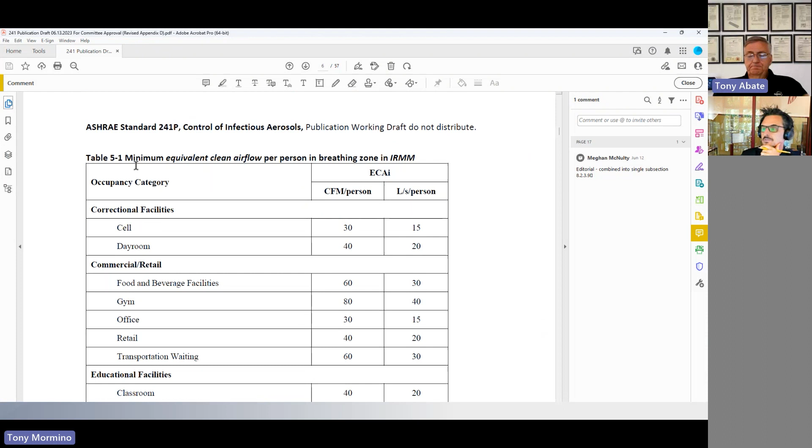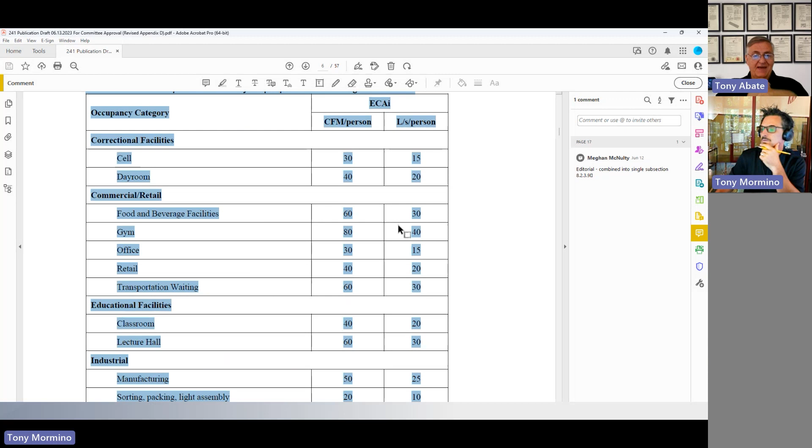So this is right here, Tony, table 5.1. Yeah, exactly. Those are all those enhanced CFM per person. Just look at them. For instance, a gym, 80 CFM of air per person. You know what the occupancy of a gym would be. So that is a lot of air.

So how do you get there? Well, for one thing, you can design your mechanical system to have the capability to bring in that much outside air. Very likely it doesn't have that—it likely was never designed for this. Right, but you could redesign it, take whatever steps are needed, and achieve these rates. It's not impossible. Probably impractical, but not impossible.

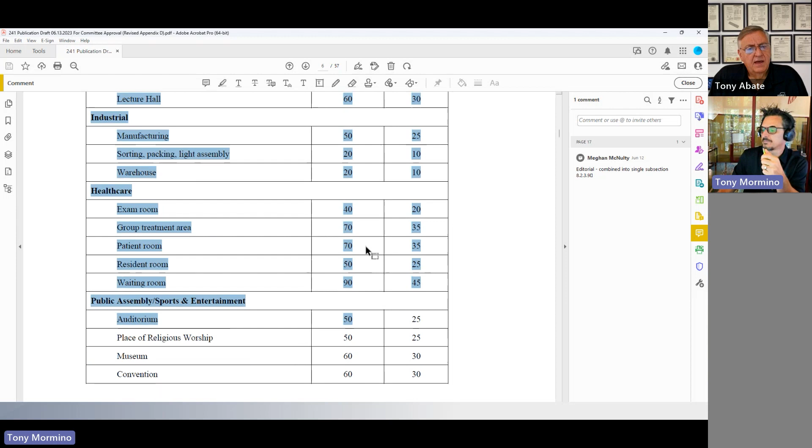And again, this isn't meant to be continuous. It's meant to be during the heightened concern—emergency mode, right, exactly.

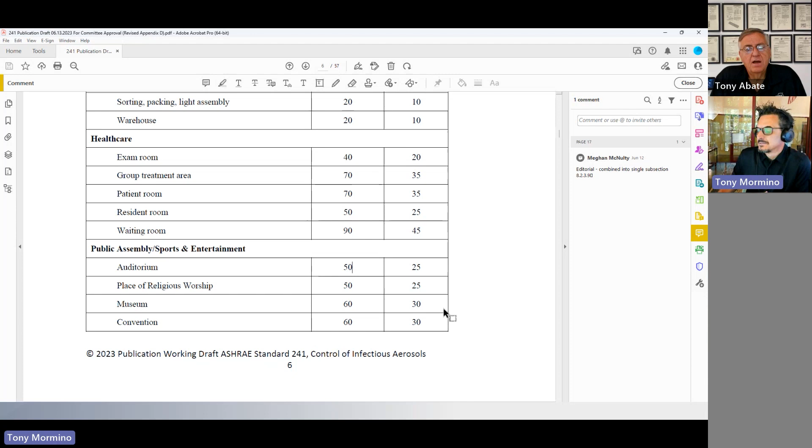Now here's where something very interesting comes in that was really kind of groundbreaking: the concept of equivalent clean air for infection, ECA with a little 'i'. What that means is that rather than just simply relying on outside air, you could look at air cleaning. The whole point is to deliver pathogen-free air. Now, if you bring in a lot of air from the outside, chances are it's going to be pathogen-free. And if it isn't, we have such bigger problems, it doesn't really matter what we did in the building.

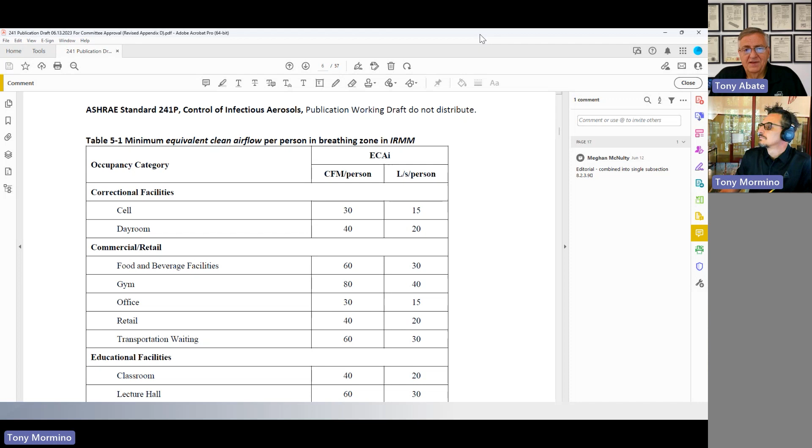However, there are lots of ways you can provide pathogen-free air in a building. You can take different types of air cleaning strategies, either singular or layered, and deliver pathogen-free air to the occupants. So what the standard says is: I don't really care if you use air cleaning to deliver pathogen-free air or you use outdoor air to deliver it. Just be sure you deliver 80 CFM per person of it in a gym, for instance, and so on and so forth. This is very different from all other ASHRAE standards, which basically always rely on the principle of dilution—bring in a certain amount of outside air, and then you will produce acceptable air quality.

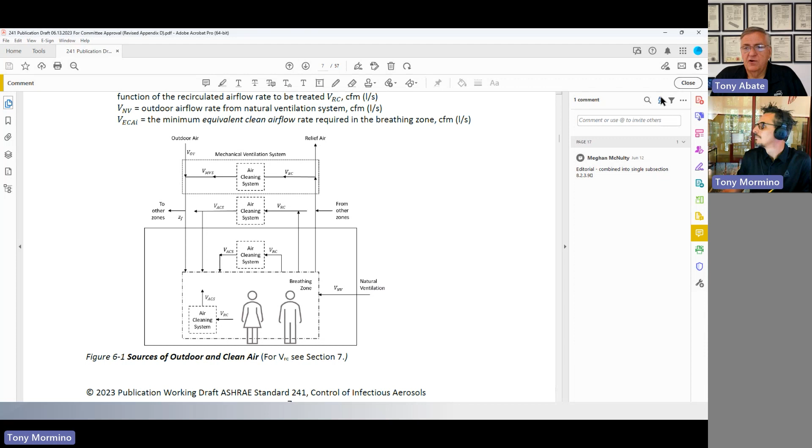It's really the oldest indoor air quality adage that's ever been used: dilution is the solution to pollution. 62.1, ventilation for acceptable air quality, is built on that premise. If you go with the VRP method, what is it really doing? You bring in a certain amount of outside air per person, and the building is assumed to be good.

So here, air cleaning becomes now a very viable part of the strategy. Because as you look at those tables and the rates you must achieve, it's really very unlikely you're going to do it with outside air alone, unless you take on some major redesign and major cost implications just to have that airflow available. But now, of course, you want to make that air comfortable, so you have to condition it all.

So I'd say the chance of that happening is pretty close to zero, ever. Well, I was talking to one of our engineers earlier today, and really think about the engineer that has to design a space. Oh, it's crazy, right? So is he going to design...

80 CFM per person times the occupancy, thousands of CFM of outside air, which again isn't going to be used on a continual basis, it's going to be used when it's needed. But you still have to design your system for that peak. If it ever happens, if you've got a gym that's normally 40 tons, now you've tripled that. So you have this V8 engine that you're going to be running on 4 cylinders most of the time.

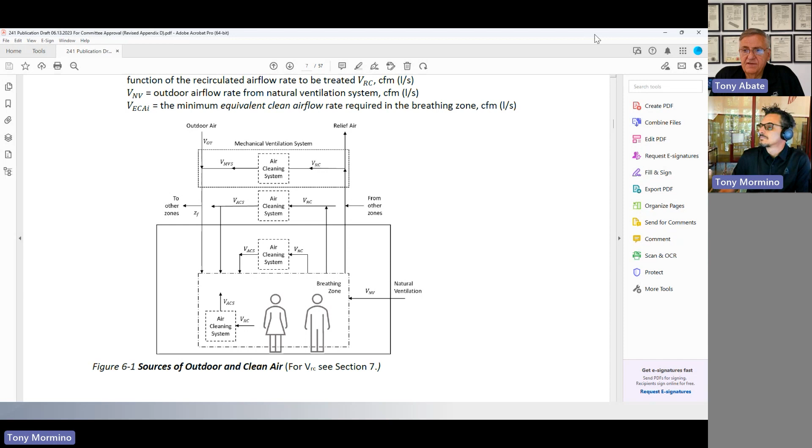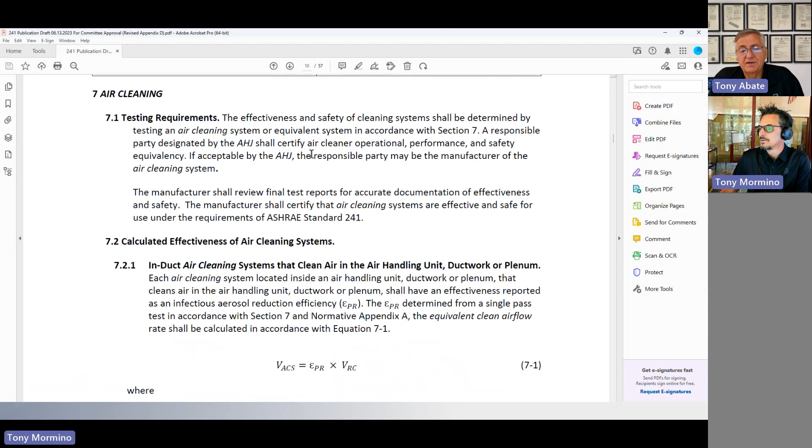It's much less likely that you're going to do that, but much more likely that you're going to look at air cleaning. From the AtmosAir perspective, as this was being developed, I was pretty excited because I said, now I think air cleaning is finally getting its place in an ASHRAE standard in a more prominent way, and not kind of hidden in the shadows of the IAQ procedure, so to speak. Because being able to clean that air is equivalent to being able to use outside air, equivalent clean air, all about delivering pathogen-free air.

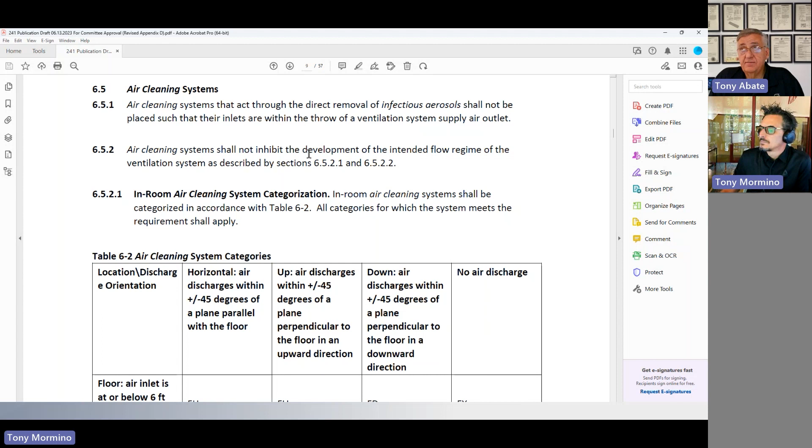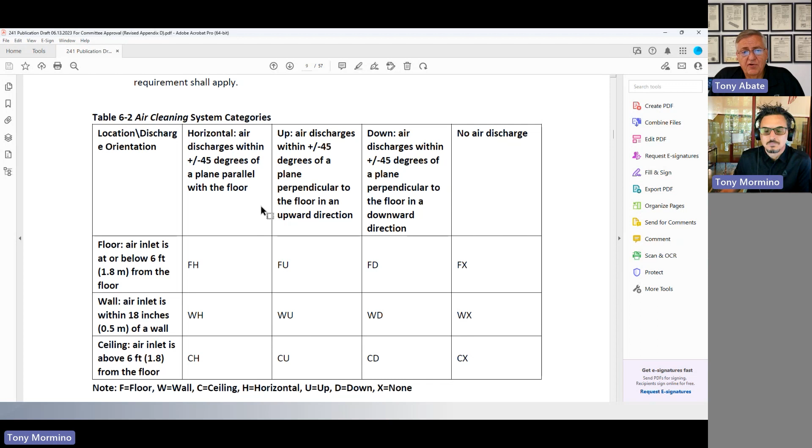Now, how you do that is defined in different parts of the standard. They talk about categories of air cleaning systems. What are the types? These could be in-duct systems, these could be in-room systems, or this could be a combination of both. So there's really an agnostic approach to air cleaning as far as the standard is concerned. You aren't limited to one type of design or another.

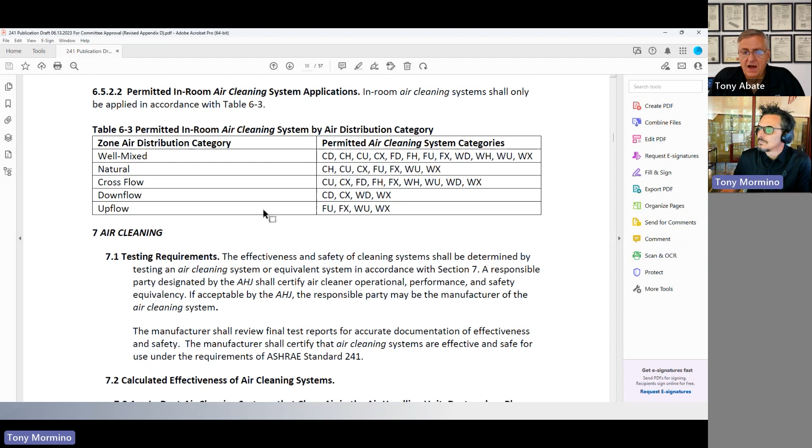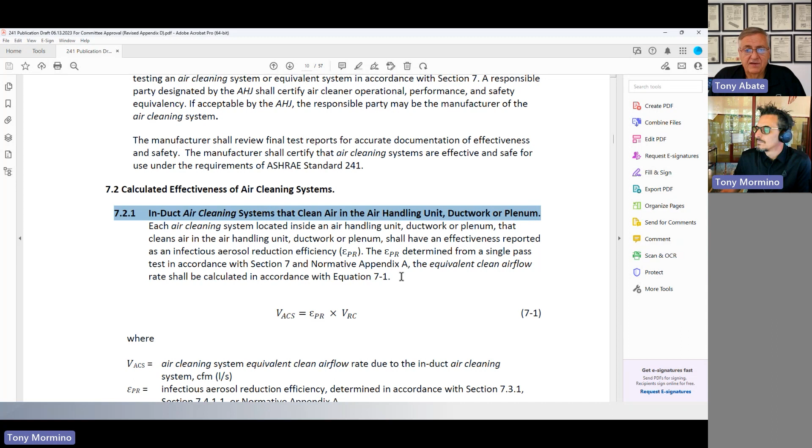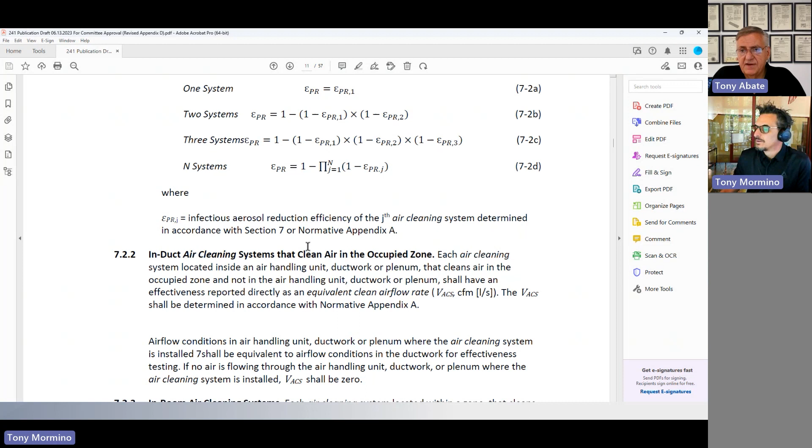It just depends upon the effectiveness of your technology, and how it can then, by means of calculations put into the standard, contribute to that ECAI number that you need to achieve. Does it go into the specifics of the types of technology, or just say you've got to meet this equation based on testing data you already have? It doesn't really specify types of technologies, but it specifies what those technologies have to achieve as far as proven effectiveness and proven safety.

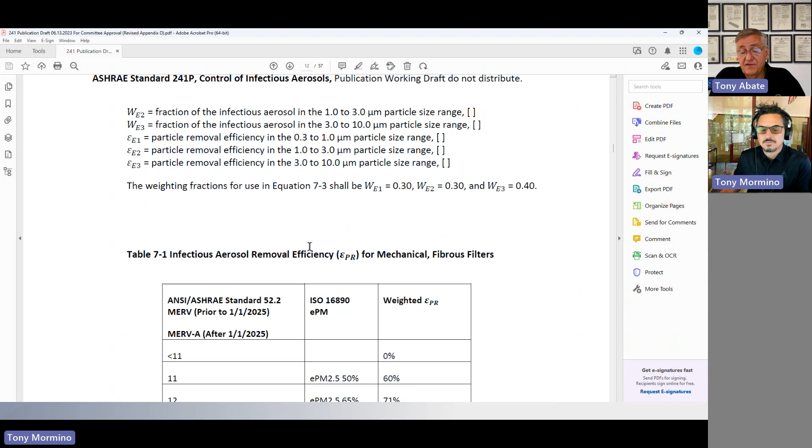At the end of the standard, there's a section called Normative Appendix A. Normative Appendix A lays out what constitutes the effectiveness of the air cleaning system. What types of testing should it have? What kind of performance metrics should it have? What kind of safety metrics does it need to meet? Very well spelled out, very well defined.

What you'll see is that it's depending upon manufacturers that have tested their product to standardized test methods. A lot of manufacturers have a lot of products and claim great efficiencies, 99.99999 to do this, that, and the other thing. It's not uncommon. But when you peel that onion back a layer, you may find they achieved that in a customized test. The manufacturer went to the laboratory and said, I'd like you to test this product this way. The laboratory says, you're going to pay me to do it? And they say, yep, and so they do it.

What this is saying, and really what I think more premier manufacturers will do anyway, is they'll test the product to a standard that already exists. So they say to the laboratory, test my product, and what protocol, what test method would you apply to this product?

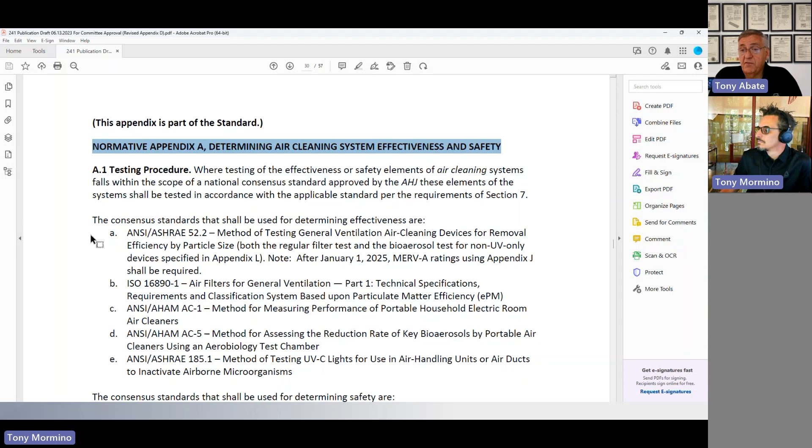For instance, let's say you're testing a portable room air cleaner, and you want to show how well it removes particulate. Well, there's a standard for that: ANSI AHAM AC1. You see that right there in 241. If you have a product tested to that standard and you have a performance measure to it, well, that's great for us, and you could put it right in here.

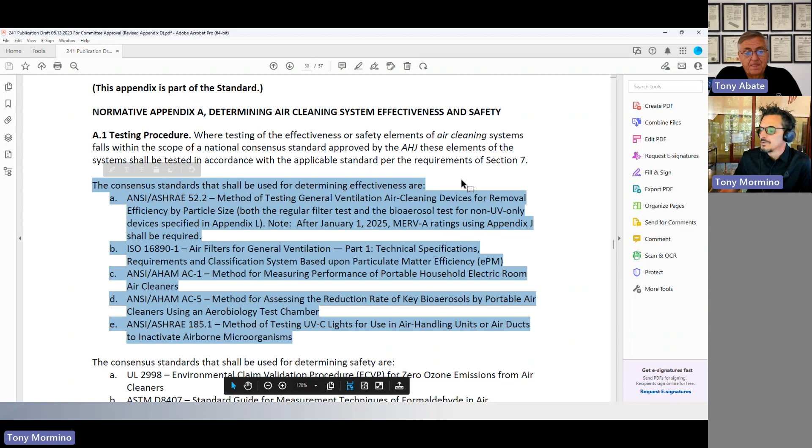So these are the standards you're referring to right here. Those are some of the standards. There are others. This doesn't limit it to just this group, saying unless you're tested to these performance metrics, you can't use the product.

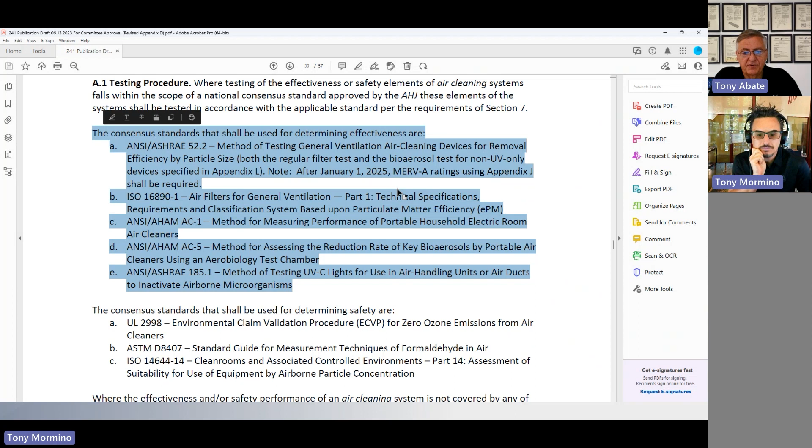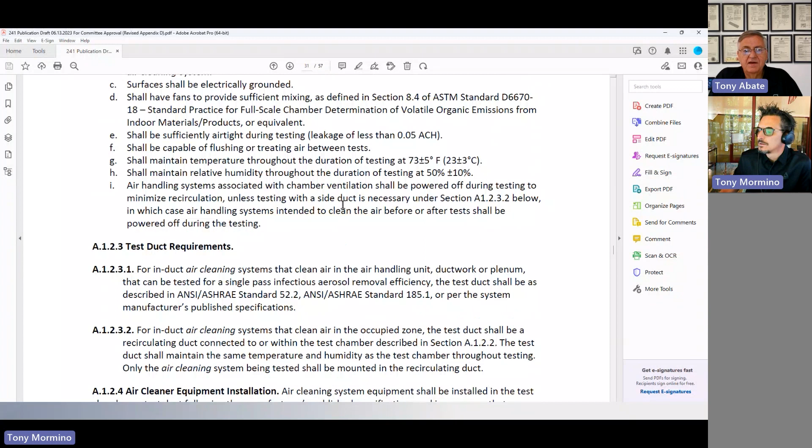Again, if you keep scrolling down a little bit, Tony, where the effectiveness or safety of a system is not covered by any of the above standards, it gives you the opportunity to really use something that doesn't have a national consensus standard. Did I pass it? Am I almost there? No, you actually went too far. I went too far, that's what I thought.

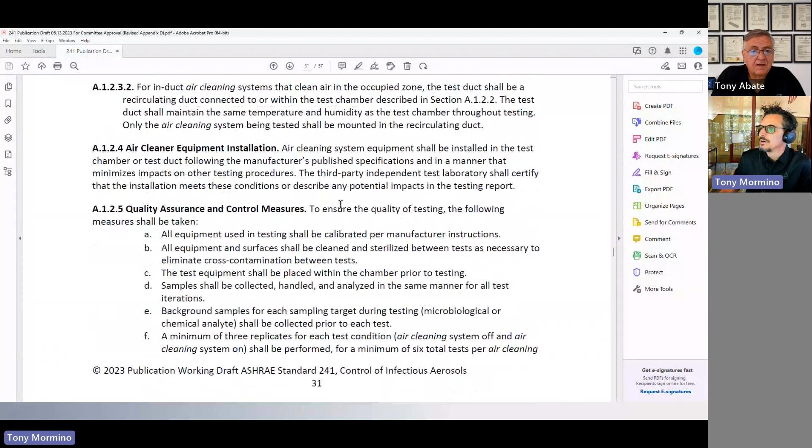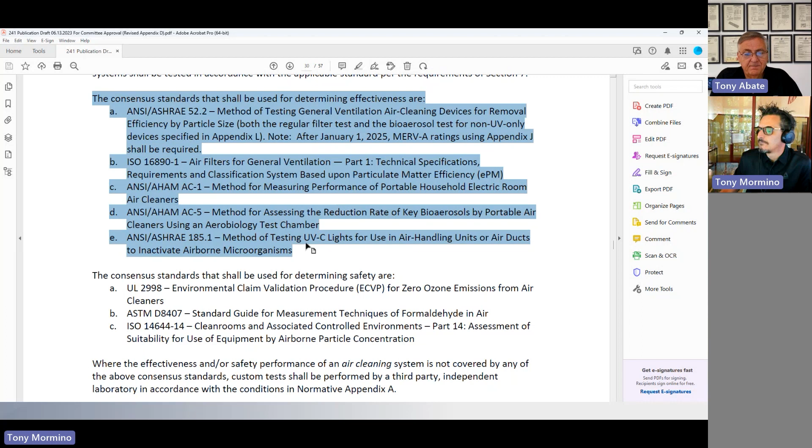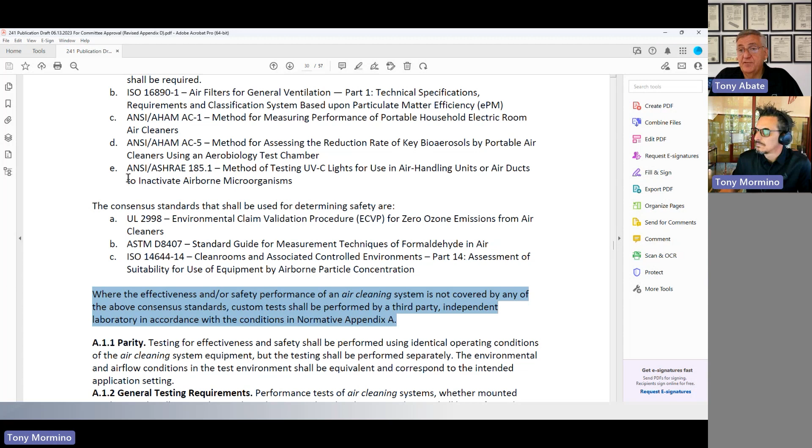Let's see here, go back a little bit more. Let's see, where are we? You're just right there, so that last paragraph. Ah, gotcha. Custom tests shall be performed by a third-party independent laboratory in accordance with the conditions in Normative Appendix A. So it's saying, hey, if your product doesn't fit one of these test methods, it's okay—test it by an independent third party, but they need to operate within some of the criteria listed in the standard. As we go further down, it talks about what those criteria are. This is giving guidance to the laboratory on the things you should do when testing this product.

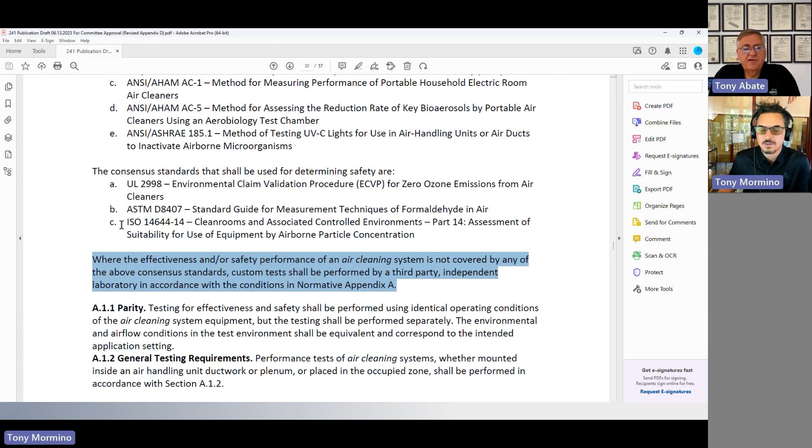And specific to AtmosAir, we already have testing done that complies with this normative Appendix A. Yeah, exactly. AtmosAir has done, first of all, one test that's called out very specifically above, ANSI AHAM AC-1.

That's been done on the AtmosAir technology already. We did that many years ago and have a stated performance in a metric called CADR, clean air delivery rate. You can take that and drop it right into the ECA calculations to add to your equivalent clean air rate. That already exists.

But also, AtmosAir's testing done in laboratories, like with MicroChem, looking at microbial reduction against coronavirus, MS2 bacteriophage, E. coli, staphylococcus—these are all done to ASTM standards, and those ASTM standards conform to all the requirements put into this normative Appendix A. So yes, those could drop right in.

And of course, for people unfamiliar, some of those were very impressive results—98, 99% effective on these various types of pathogenic elements. So that leads AtmosAir to being able to help toward that equivalent clean air calculation.

We've actually begun to build out our IAQP calculator, which we've had for many years. We call it Atmos IQ, now with a 241 section, so the engineer doesn't have to sit there and try to figure all these things out and spend days and days boiling down these calculations, no differently than when applying the IAQ procedure.

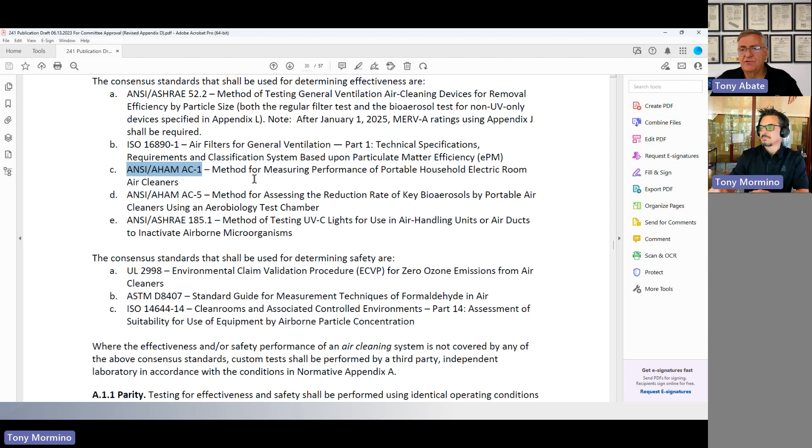There is a calculator that was provided as part of this standard. It's really buried at the end. There's a web link that brings you to a calculator that explains how ECAI is achieved. It doesn't tell you what any particular technology might do—it just shows you how to calculate ECAI. So that's free for any engineer.

But again, we want to take it a step further at AtmosAir—saying, okay, if you're going to design to this and also want to use our technology, let's give you a calculator that allows you to put that in. Actually, that's it—that's the ECA calculator. We wanted to give something specific to AtmosAir that's also kind of simple.

Is that available now, or is it still behind the scenes? We're trying to get the finishing touches on it. Our in-house engineers want to make sure it's right before we put it out, but it's coming soon, and I think it'll be a real handy tool as people start to want to apply this standard.

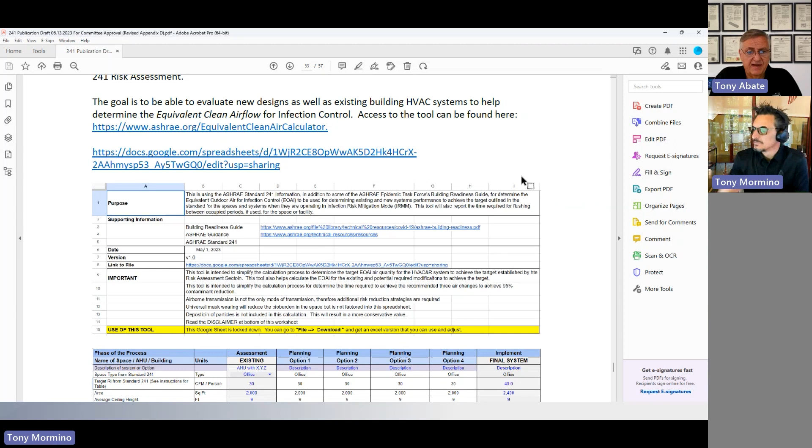This calculator here, while it's very good for explaining things, is a little complex—look at all those different possibilities you have there. So we wanted to do something to say, let's get you to the same answer, but let's take the shorter road instead of the long road.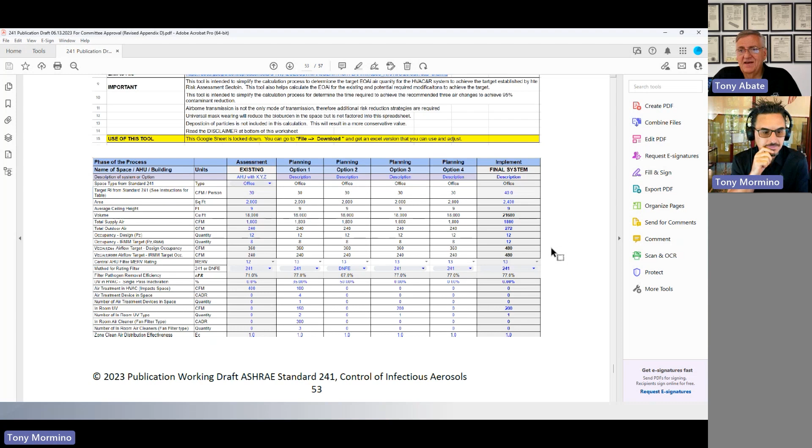Also, some things this standard touches on, very different from a lot of other ASHRAE standards, is that it goes into operations and maintenance. Usually most ASHRAE standards end with design—okay, you designed it this way, the building should run fine, go with God, you're all set. We all well know that the minute the certificate of occupancy is turned over, things change in a building.

So part of this standard isn't just that you designed something one time—it's that you need to keep records and maintain what you designed so it's operating in the same state as originally intended. So there's a lot here that goes beyond day one: operations and maintenance, and making sure these systems keep correctly operating to perform the task they were designed to.

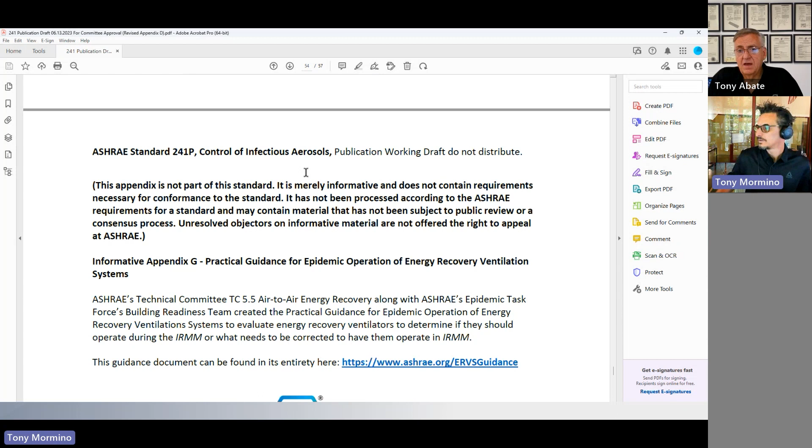Excellent. Well, it sounds like a lot different than the standards before this, that's for sure, in terms of the attention to the filtration aspect of it, or the air cleaning aspect of it.

Yeah, it is a big departure. I mean, I've been involved again in a lot of ASHRAE standards, and certainly 62.1 being the most prominent. And again, when you kind of peel back to the core, they all seem to be based around one thing, and that is outside air and then mechanical filtration, somewhat fibrous filters, but really about volumes of outside air.

Ensure clean air on the inside. That approach is kind of hoping to achieve a good result. This is taking a different approach. If you're looking at air cleaning systems that have tested, measured effectiveness.

We can't test or measure the effectiveness of outside air. Outside air changes every day. We all well saw, especially in areas of the Northeast, in early June, what can happen when the outside air decides to turn on you with all those Canadian wildfires.

So outside air is not a set thing. It's a variable. It's going to change in quality from day to day. My air testing background, the one thing that would drive me batty when trying to do, let's say, a comparison air test, is I knew what was happening in the building. I knew what was happening in the mechanical system I was testing, but I had no idea what was getting delivered from the outside.

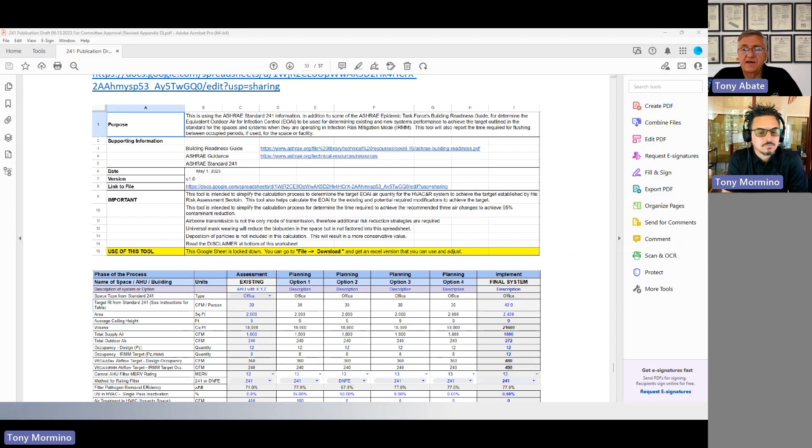What I think could likely happen, and it's kind of happened early on with the USGBC, is the GBC and the LEED standard was kind of put out there and kind of muttered along a little bit. But then it got a big boost by federal buildings saying you must design to LEED silver. And all of a sudden, you had millions and millions and millions of square feet going LEED.

And then, we live in a Me Too world. So then, buildings in the private sector started saying, well, we should have to design to this. And so USGBC obviously became very prominent.

I could see something similar happening here because the impetus for this came from the White House. So it might be a natural thing for government to say, in government facilities, we want them engineered to the standard 241. We want to be prepared. And then that kind of a directive, when you have prominent square footage starting to be designed to the standard, leads to that kind of Me Too approach.

And then you'll see lots of, especially big corporations with their ESG initiatives and other things. How could they not say we're going to provide a sort of healthy building? They can say, no, we're going to provide the healthiest building we can. And our guide to that has always been ASHRAE.

Yep. So, and many buildings in the private sector are doing these things. They have their own standards that they've developed to try to provide as healthy a building as possible. But now they can fall back on ASHRAE for official, code compliant guidance.